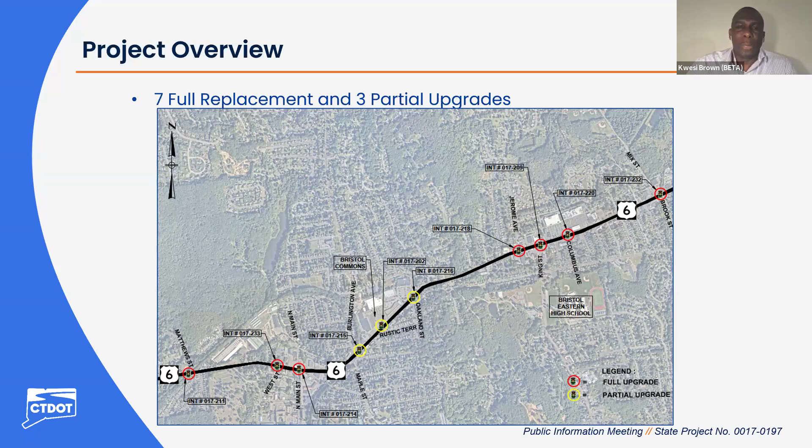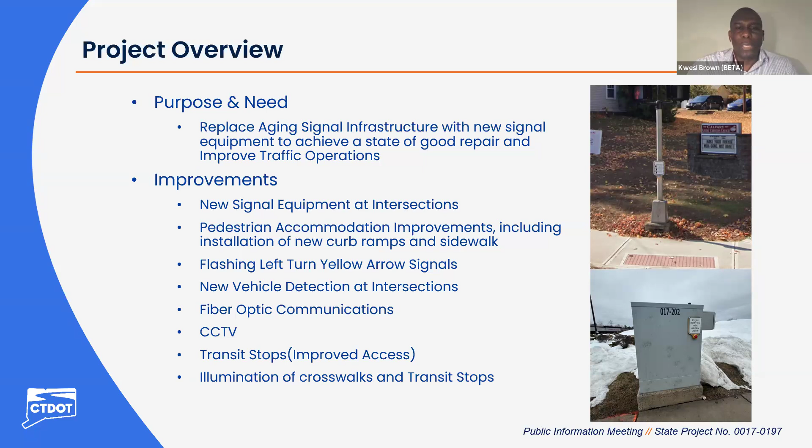The purpose and need of this project is to replace aging signal infrastructure with new signal equipment to achieve a state of good repair and improve traffic operations. Improvements include new signal equipment at the intersections, pedestrian accommodation improvements including new curb ramps and sidewalks, flashing left turn yellow arrow signals, new vehicle detection at intersections, fiber optic communications, CCTV cameras, improved access to transit stops, as well as illumination at crosswalks and transit stops.

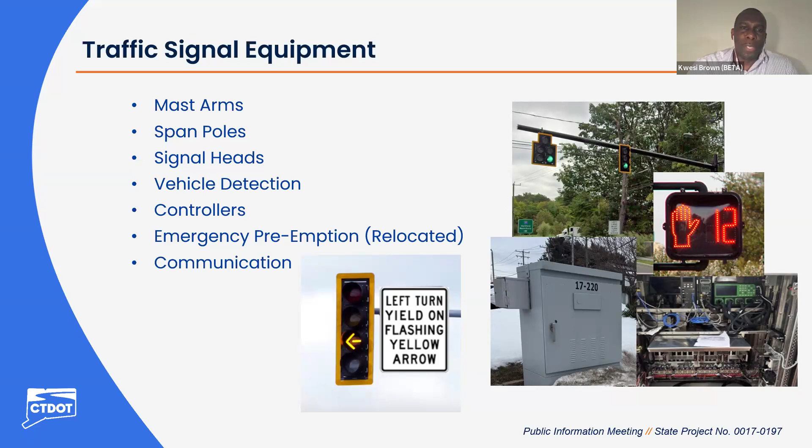Next slide, please. In terms of pedestrian accommodations, we will be installing, to the extent possible, new crosswalks on all legs at an intersection, as well as ADA compliant ramps. We'll have new sidewalks connecting to ramps and bus stops, pedestrian indications with push buttons, as well as pedestrian phasing with blank out signs.

If you look at the top right corner of the screen, you have an example of what the blank out signs will look like. These will typically come on during the pedestrian crossing phase, with the no-turn-on-red indication, as well as turning vehicles yielding to pedestrians in crosswalks.

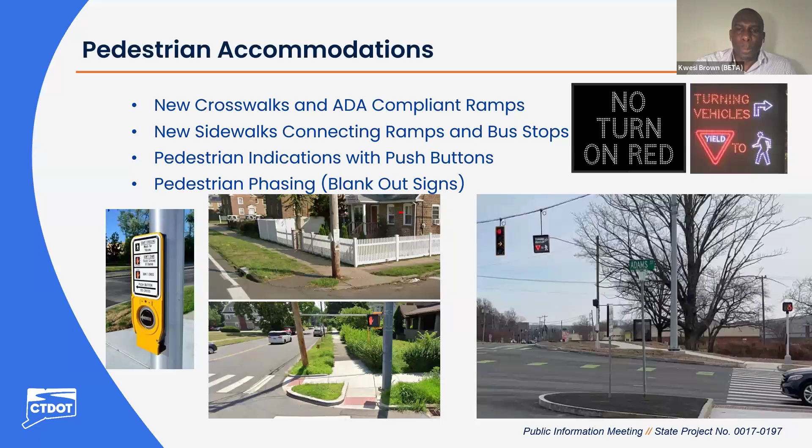Next slide, please. In terms of vehicular detection, there's going to be 2 types: a 360-degree camera for vehicles waiting at a stop bar, as well as radar detectors that would be able to pick up vehicles approaching an intersection.

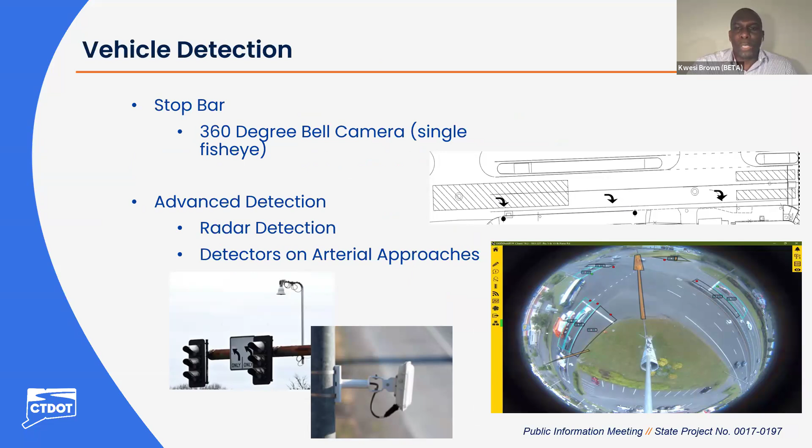Next slide. We will also have communications between the intersections within the corridor, so these signals will be able to talk to each other. Currently there is existing aerial copper interconnect within the corridor. That will be replaced with underground fiber optic interconnect, a 48-strand fiber optic cable that will run along the corridor, allowing the traffic signals to talk to each other. Additionally, we'll have connectivity to the Connecticut DOT Highway Operations Center using a wireless cellular communication system.

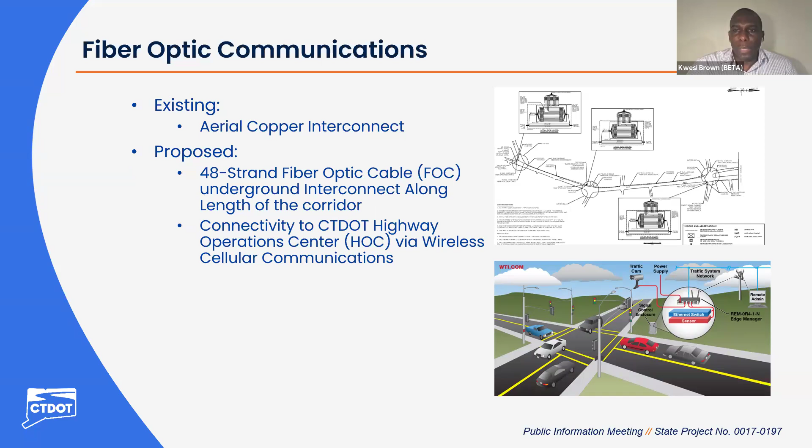Next slide, please. At this point, I want to talk in more detail about what is being proposed at each of these 10 intersections. I want to draw your attention to the legend at the bottom of the screen.

You see areas highlighted as orange; these are locations where we are replacing existing sidewalks and curb ramps. Areas where new crosswalks are proposed are shown with purple bars, as you can see on the graphic. In addition, the mast arm and signal heads are shown in blue, as shown in the legend. Finally, there are areas where we'll require right-of-way acquisition, or in this case mostly easements, shown in the purple rectangular areas on the graphic.

So our first intersection is US Route 6 at Matthews Street, intersection 17-211. As you can see from the aerial, this is a three-legged intersection, close to a railroad overpass as shown in the graphic. This intersection currently has a span wire design, and what is being proposed is a full replacement of the equipment. We will have a mast arm layout as shown, with two mast arms as shown in the graphic on the bottom right.

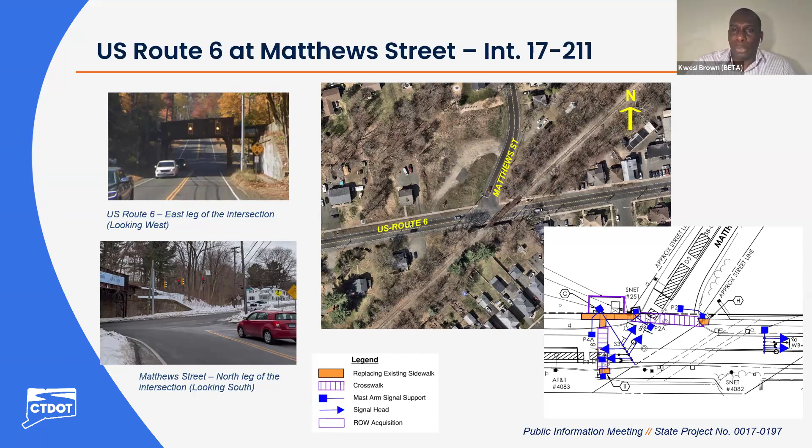The next intersection is US Route 6 at Route 69, intersection 17-233. This is a three-legged intersection as shown on the aerial. It's currently a mast arm design, and that design is going to be maintained as a single mast arm serving the intersection. There will be new curb ramps, new sidewalks, and crosswalks on all three legs, along with new pedestrian equipment and new vehicular detection equipment.

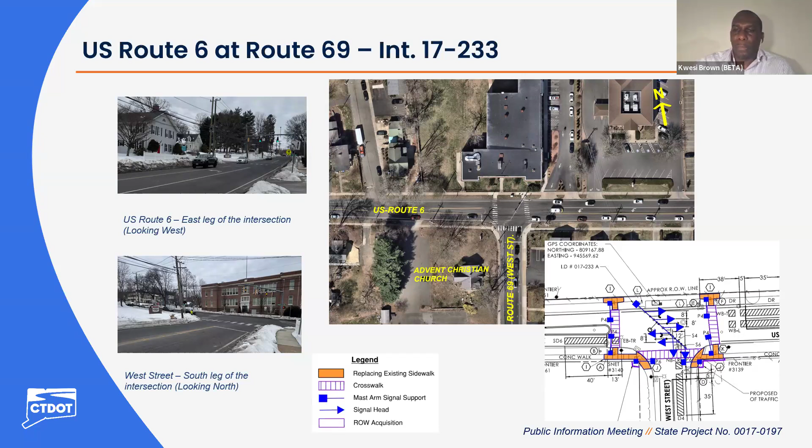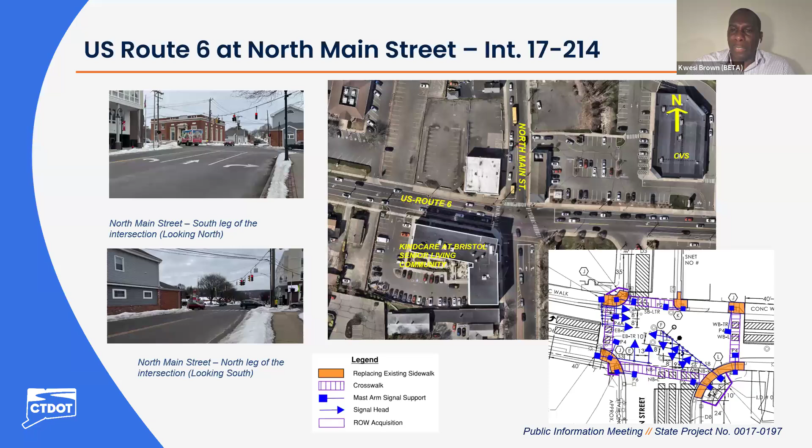The next intersection is US Route 6 at North Main Street, intersection 17-214. This is also a full replacement location. This is a four-legged intersection. The existing layout has span wires, but that is going to be replaced with new mast arms, as shown in the graphic at the bottom right. There are currently crosswalks on all legs, and those are going to be maintained. There will be new vehicular detection equipment, preemption equipment, and a CCTV camera at this location.

The next intersection is Route 6 at Maple Street at Burlington Avenue, intersection 17-215. This is the first of the partial upgrade locations. There are currently mast arms, and we are going to have new mast arms at this location. No crosswalks are currently present, and since this is a partial upgrade location, no new crosswalks are being proposed, because new crosswalks are going to be implemented as part of another ongoing Connecticut DOT project.

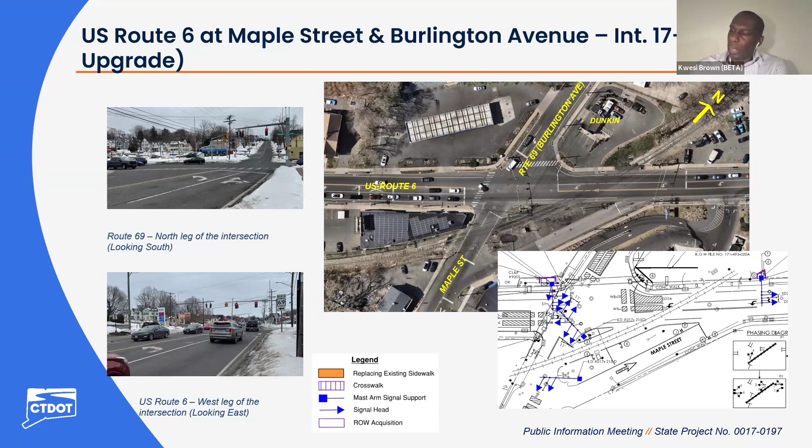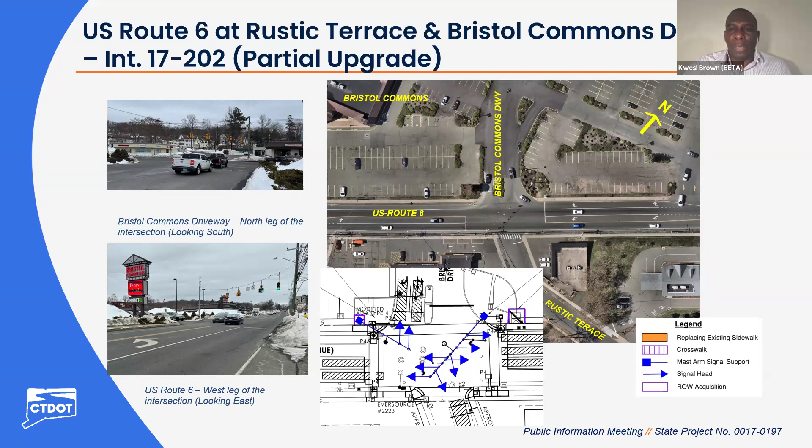The next intersection is also a partial upgrade: US Route 6 at Rustic Terrace and Bristol Commons, intersection 17-202. It's currently an existing span wire configuration. For our design, we are proposing two new mast arms, as shown in the graphic. There will be no pedestrian improvements as part of this project, because pedestrian improvements, crosswalks, and ped equipment are being proposed under a separate, ongoing DOT project ahead of the one we're currently designing.

The next one is also a partial upgrade intersection: US Route 6 at Oakland Street, intersection 17-216. It's a four-legged intersection that also has span wires. The only improvement going to be implemented here is the fiber optic interconnect, which will allow this intersection to communicate with adjacent intersections. The signal equipment and pedestrian upgrades are going to be undertaken under a separate, ongoing Connecticut DOT project.

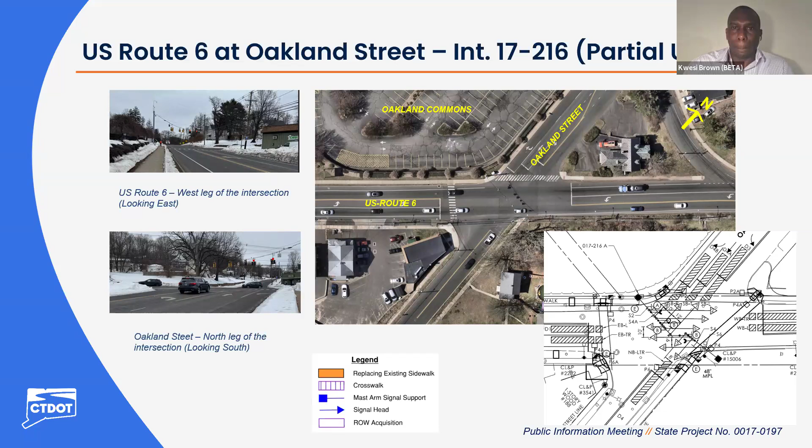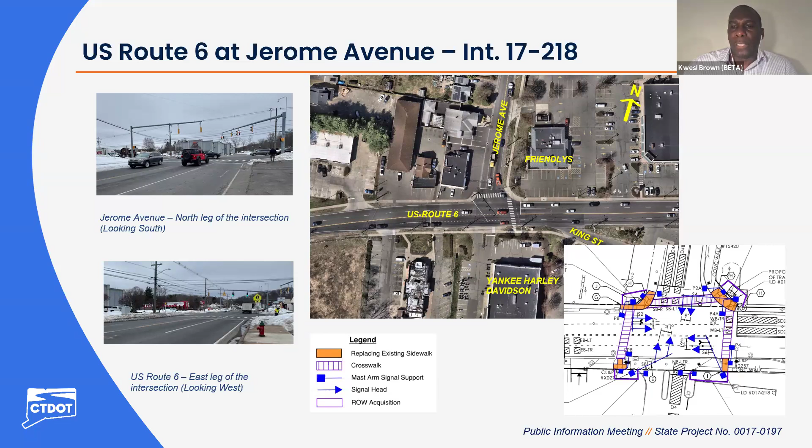The next intersection is US Route 6 at Jerome Avenue, intersection 17-218. This is a full replacement location. It's a four-legged intersection that currently has two crosswalks. Under this project, we are proposing crosswalks on all the legs. In addition, we'll have mast arm configurations, new vehicular detection, preemption equipment, and CCTV.

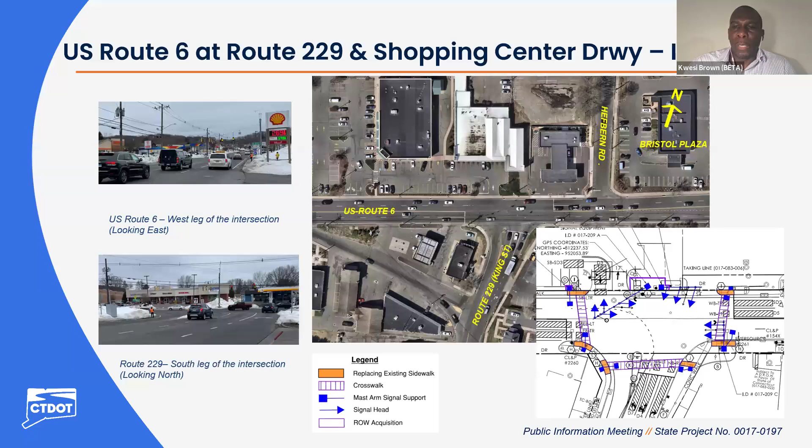The next one is US Route 6 at Route 229 and Shopping Center Driveway, intersection 17-209. This is also a full replacement location. It's going to have new mast arms and crosswalks on three of the legs. It will also have pedestrian signal improvements, vehicular detection, preemption, and the interconnect going through this intersection to communicate with adjacent intersections.

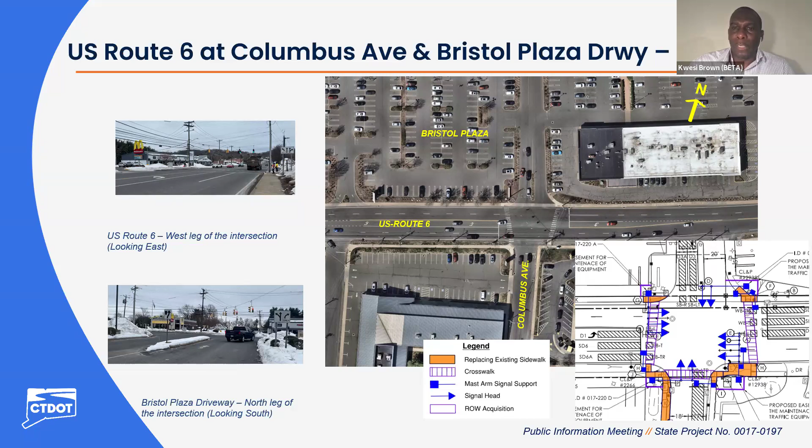Next is Route 6 at Columbus Avenue, Bristol Plaza Driveway, intersection 17-220. This is also a full replacement location. We'll have four new mast arms, sidewalk and curb ramp improvements as seen in the graphic, crosswalks on three of the legs with pedestrian signal improvement equipment, as well as vehicular detection and preemption equipment at this location.

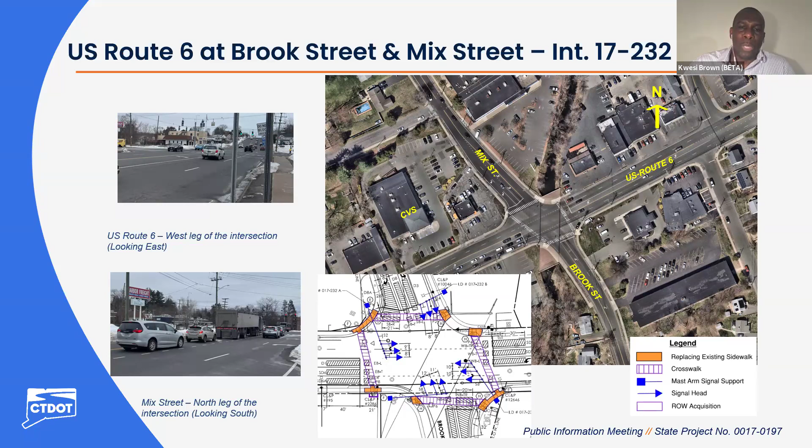The last one on the eastern terminus of the corridor is US Route 6 at Mix Street at Brook Street, intersection 17-232. This is also a full replacement location. It's going to have four new mast arms with crosswalks on all the legs, pedestrian signal improvements, curb ramps and sidewalk improvements, vehicular detection, and communication systems, as we have for the other locations.

So we've been doing a lot of project coordination even to get to this point. We've had outreach with city staff. Notification letters were sent out to the city on March 11th of this year. We had a virtual meeting with city staff to introduce the design on June 16th of this year. And that coordination is ongoing. We are having this virtual public information meeting today, and we will continue to coordinate with the utility companies to make sure there are no issues with our design. We anticipate having a virtual utility meeting in the middle of July, and then having field meetings at the end of July for this project.

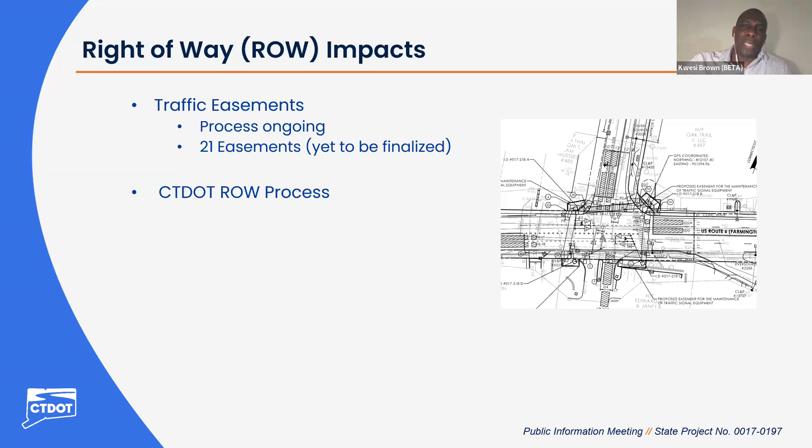So with that, I'll hand over to Jack Carlson, who is with the Connecticut DOT Division of Rights of Way, to talk a little bit more about the rights of way process. Thank you, Kwesi. Good evening. My name is Jack Carlson, and I'm a project coordinator with the Department's Division of Rights of Way.

Our office is responsible for acquiring the property rights needed for transportation projects. Within our office, we have different agents that you may interact with. You have your administration agents, such as myself, who oversee the projects and files for each project. You have our title searchers who search the land records in the town hall to confirm proper ownership of the land and check for encumbrances or any barriers to acquisition of the property rights.

You have our licensed appraisers who prepare cost estimates as well as provide valuations for files. You have our acquisition agents or negotiators. Typically, that's the first agent that you'll interact with. They're the ones who will prepare the offer, mail it to the property owner, and negotiate with the property owner. And then you have our title closing agents who are responsible for preparing any of the necessary documentation to record the easement or acquisition on the land records, as well as render payment during the closing process.

As Kwesi mentioned earlier in the presentation, this project will require the acquisition of property rights, so I'd like to give a brief overview of our acquisition process. Any required property rights will be acquired in accordance with Connecticut General Statute Section 13A-73 and 13A-98E, as well as the Federal Uniform Act. Additionally, the specific right-of-way impacts are still being finalized and may change as the project design progresses.